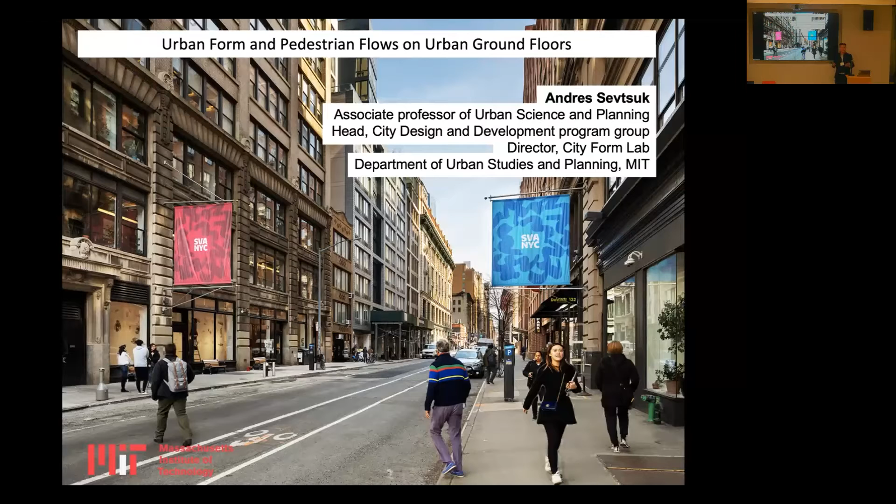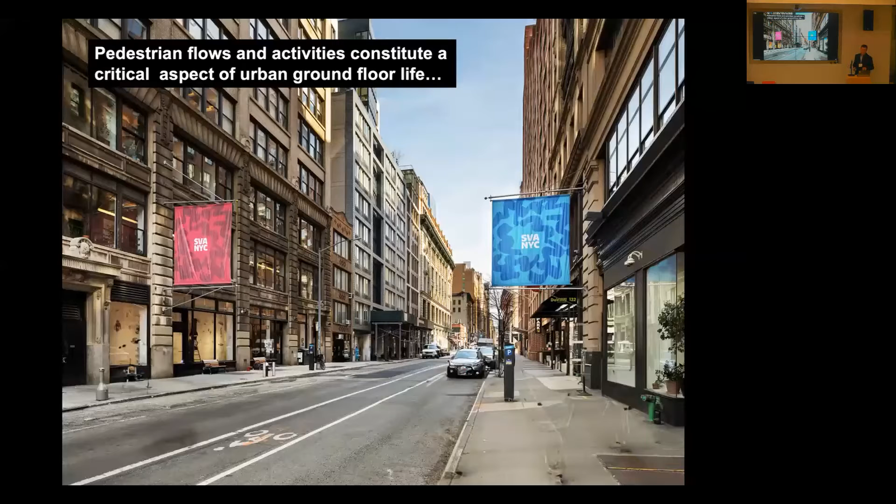Okay, so next I was planning to present some work we've done here at the City Form Lab Research Group on analyzing pedestrian movement in cities and how that interacts with urban design.

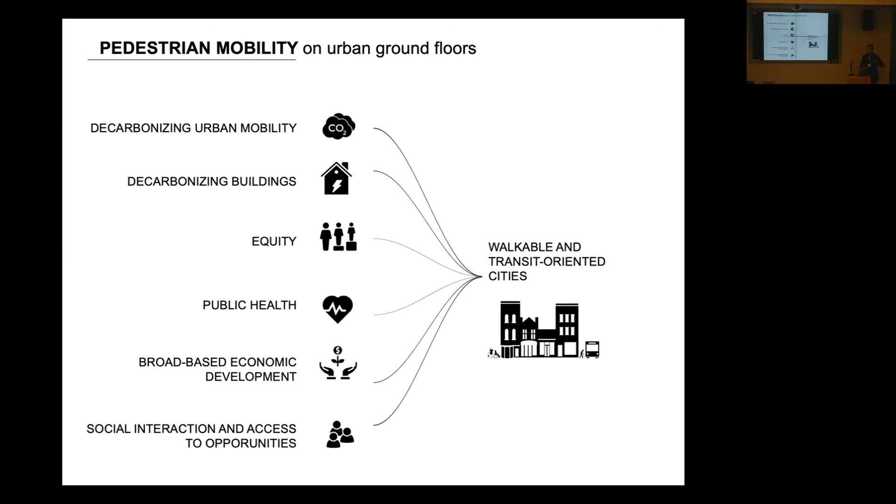And I think this question of pedestrian mobility and pedestrian behavior in public space has really relevance to urban design and planning across the board, from public health to decarbonization to social or even economic well-being. So there's broad interest around that.

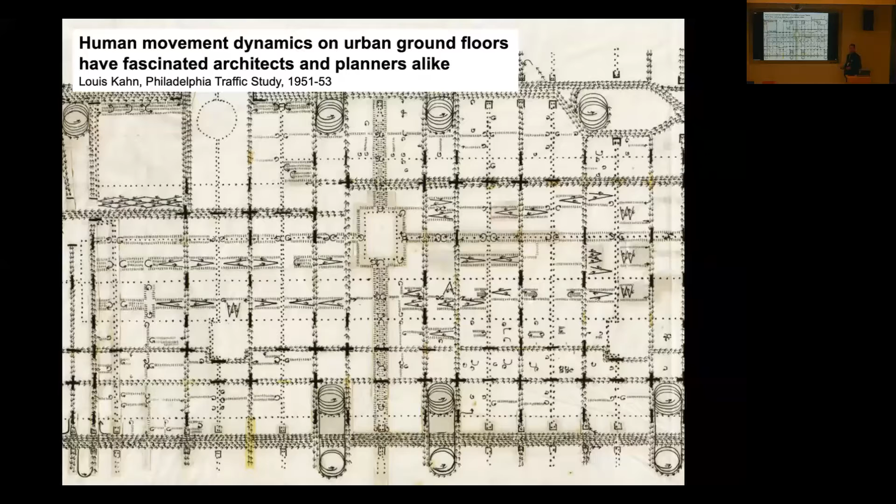And it's been a topic that, at least amongst designers, historically has been of great interest, like for instance illustrated here in a famous drawing by Louis Kahn in Philadelphia, the map that Brent showed yesterday as well. Folks who have written about this have argued typically that it's a really important quality of built environments that is something we can feel and act on, but cannot necessarily describe or record. This is from Alison and Peter Smithson.

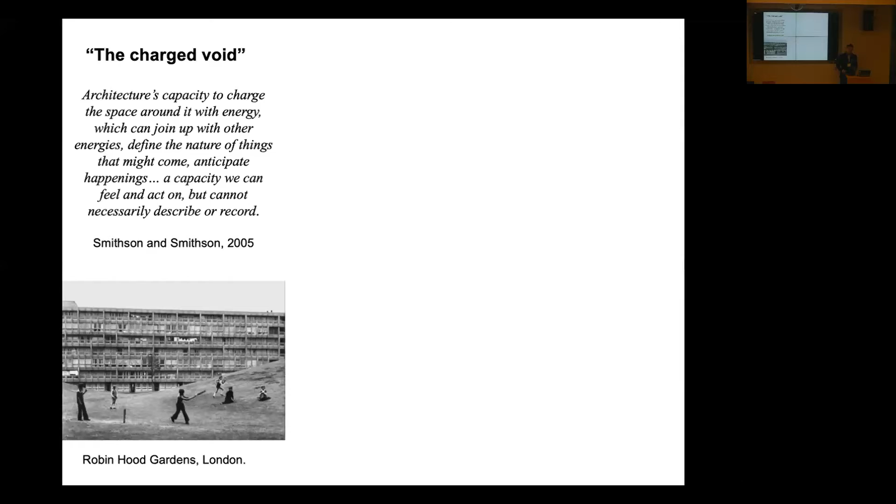Jane Jacobs famously referred to it as the sidewalk ballet, very poetically describing what happened on her Hudson Street environment in Lower Manhattan, or Jan Gehl, Life Between Buildings.

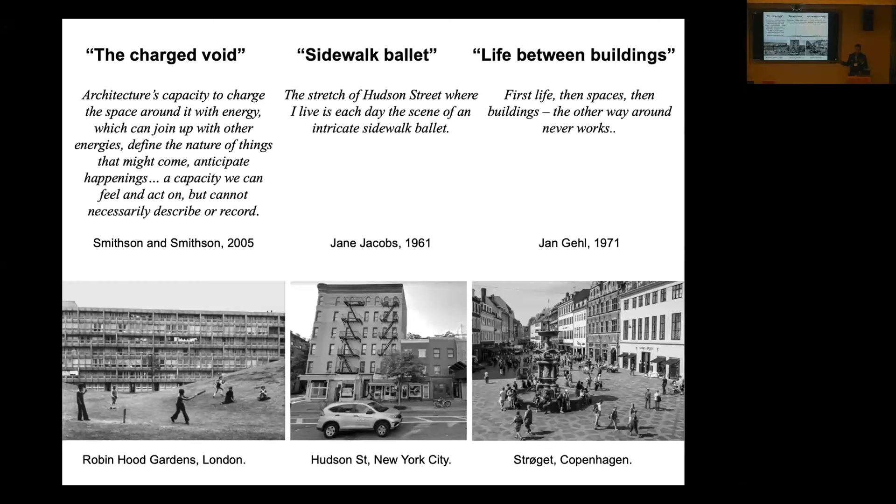So in the research group here, we have been working on ways in which we can actually measure and record how built environments produce pedestrian dynamics between the buildings. I'll briefly try to introduce the conceptual framework of how this is done, and then illustrate it with a case of some recent work we have been collaborating on with colleagues from the American University of Beirut.

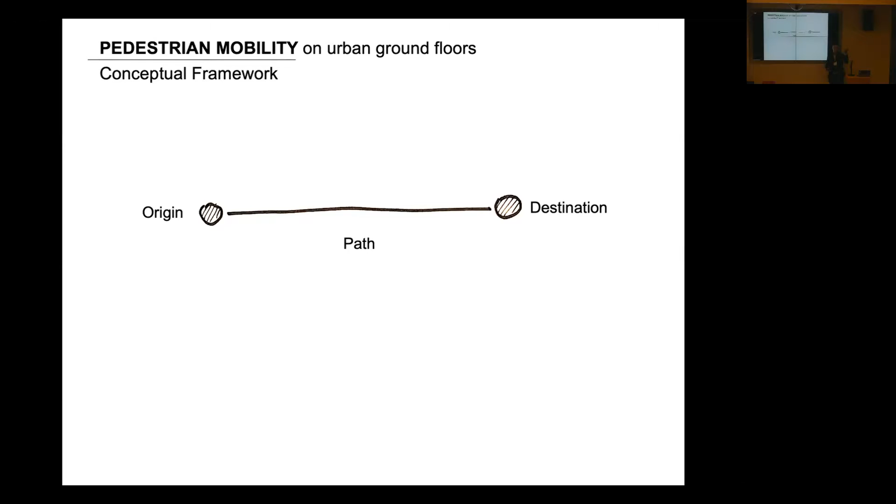So in built environments, in these sorts of trip models, we typically think of trip origins, trip destinations, and paths that connect them. These can be on the ground floor, or they can also be three-dimensional, going indoors and outdoors of buildings. The likelihood of anybody to make a walking trip from an origin to destination really depends on the perception of travel cost, usually represented by distance or travel time. As the distance or travel time increases, the likelihood of walking anywhere on foot decreases.

But it also depends on the characteristics of the route. So if the route is unpleasant, or is perceived as unsafe, or too hot or climatically inappropriate, then this likelihood really differs. It depends on how we perceive the cost of the walking path, and that's something that can actually be represented.

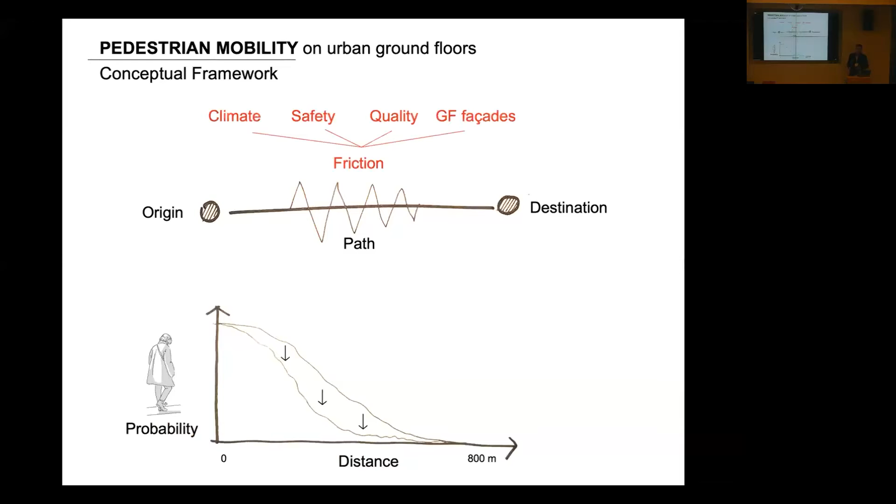So climate goes into it, safety, quality, the quality of the ground floor interface, as Stephen was describing yesterday, or the facade, and so forth. And of course, different people perceive these qualities differently. It's not universal for all.

If you're a healthy adult, you're probably willing to walk pretty long distances, as we've oftentimes seen from pedestrian surveys we've done in Boston and other cities. But if you're an elderly person, or a younger person, or a person with different abilities to move physically, that likelihood of walking over distance, and depending on the characteristics of the route, really changes.

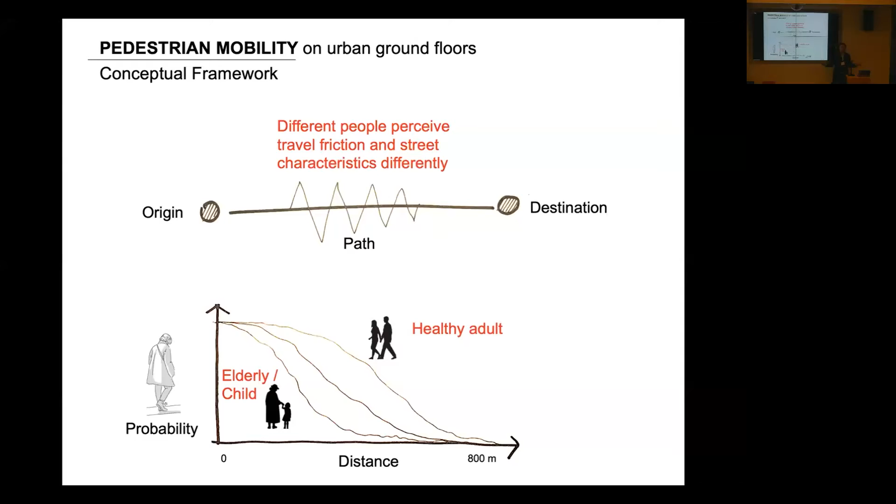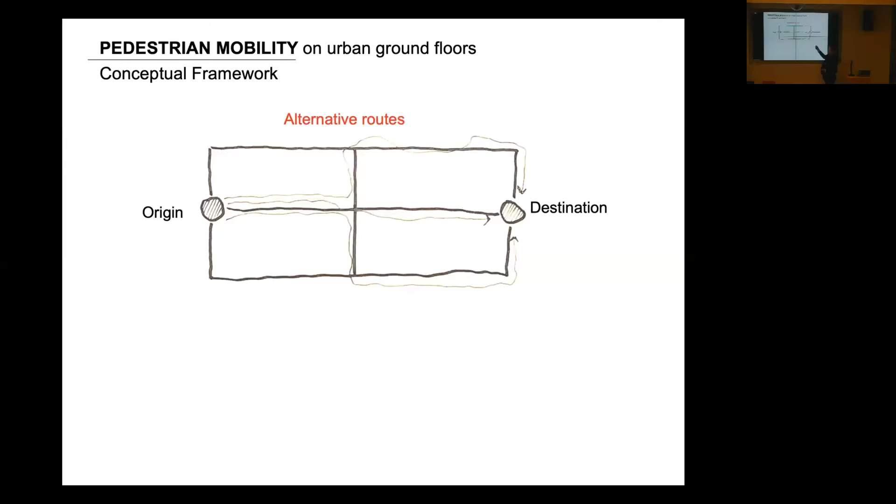Now, oftentimes people are also faced with alternative routes. They can walk not just one single way, but especially in dense urban settings with dense street networks, along many different routes. There's a process of route selection which again depends on the qualities of the routes, and those can vary by person characteristics. But people, even on different days, can take different routes, something that models have to incorporate.

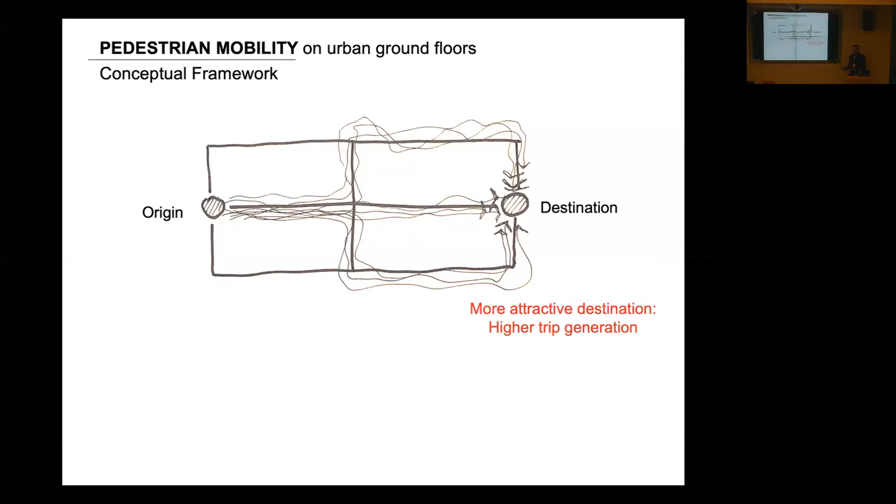Then the overall amount of foot traffic from origin to destination obviously also depends on the size of the origin, how many people are there. If we're talking about residential origins, bigger buildings obviously produce more trips than smaller buildings. And it depends on the characteristics of the destinations. The more attractive destinations pull more trips towards them, and less attractive destinations, fewer trips.

And if there are several destinations available, people make choices. If you talk about going to a park, for instance, you may have five different parks within a reasonable walk shed, so there has to be some logic of how we analyze which parks people go to. Oftentimes that is modeled or analyzed based on how accessible the park is and how attractive a park is, which can be measured to some extent.

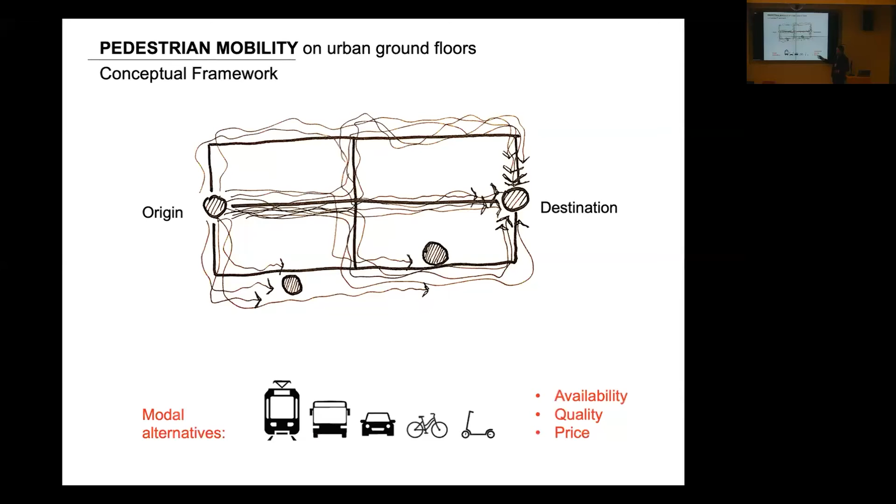And finally, it obviously also depends on the quality and availability of modal alternatives. So if it's really difficult to drive - say you're in central Paris and it's impossible to find parking, and traffic will keep you congested and stuck for an hour - oftentimes that's an incentive to not drive and to actually walk. But if you have a really fluid and amazing driving environment, even then, even if pedestrian conditions are impeccable, the alternatives might look even better and people will simply go for the better alternative.

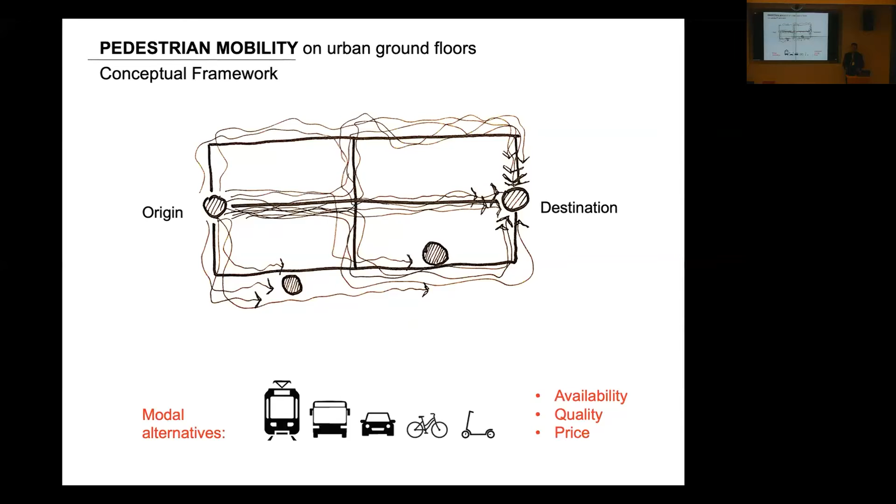So they work in combination or in comparison to each other. All of these things affect the number of people walking between origins and destinations in a city: travel costs, the choice of routes, the availability of alternative destinations, modal alternatives, and so forth.

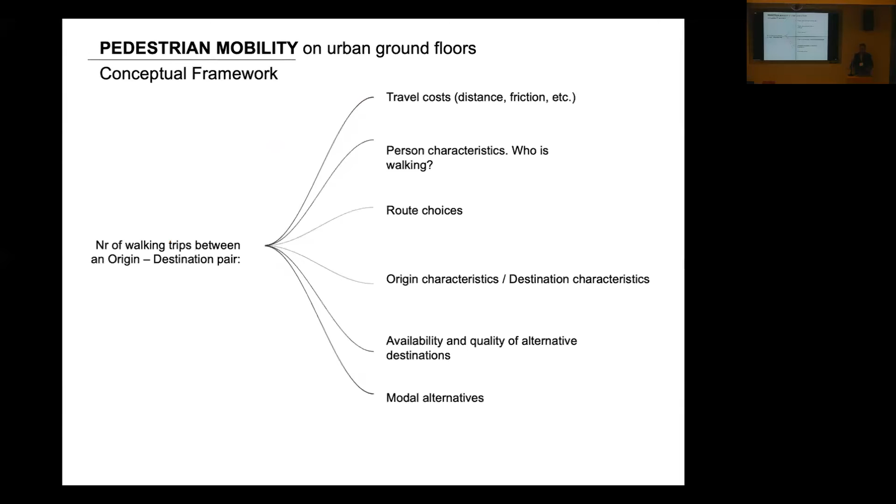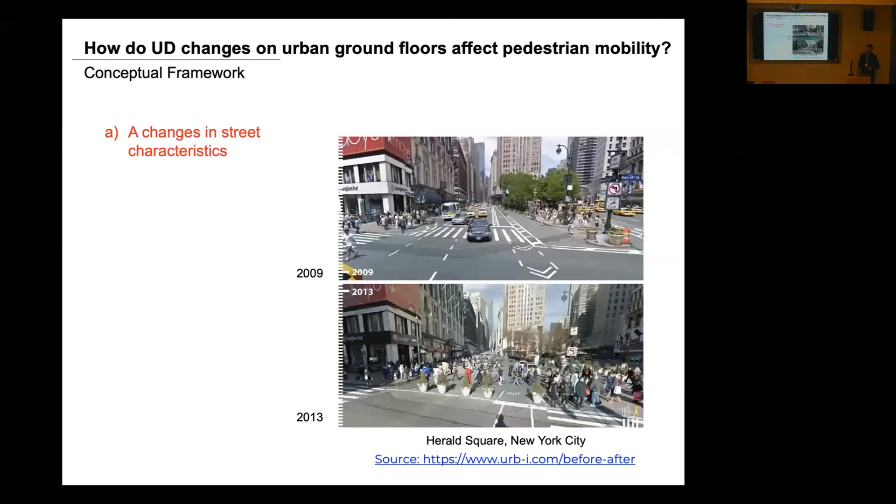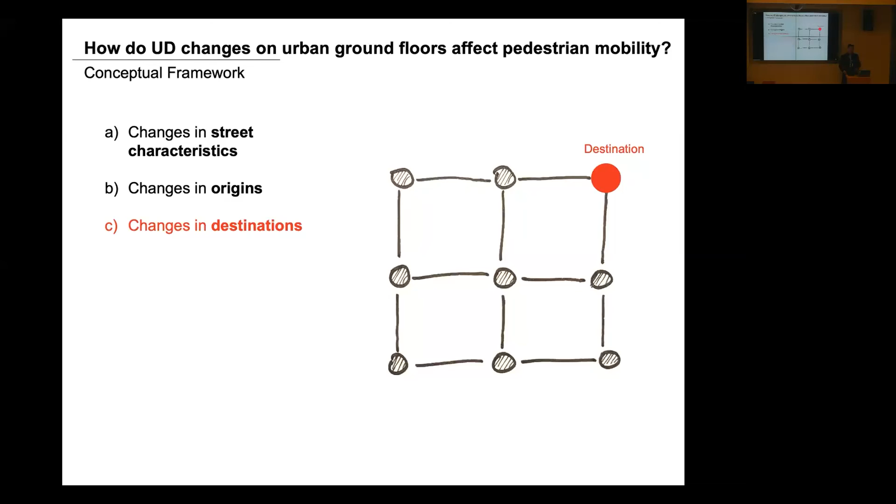What we can also do is change land use patterns in urban form and put more trip generators in places to increase foot traffic, usually through processes of densification and new construction. We can also affect the availability and quality of public destinations. For instance, having a ground floor interface, as Stephen was talking about, with more active fronts where there are destinations—cultural, service, or retail oriented—will create more draw to the streets and more destinations that people may want to walk to.

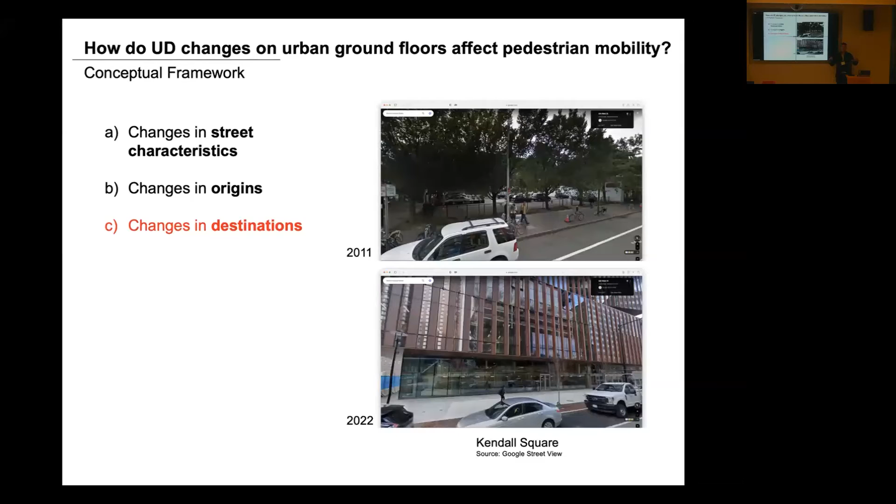We've seen this pretty starkly transforming the Kendall Square area in recent years. Right across the hotel many of you are staying at was a parking lot for many years, and it's only recently, through very strong efforts on behalf of the city of Cambridge, that those ground floors have been configured to be active and full of destinations.

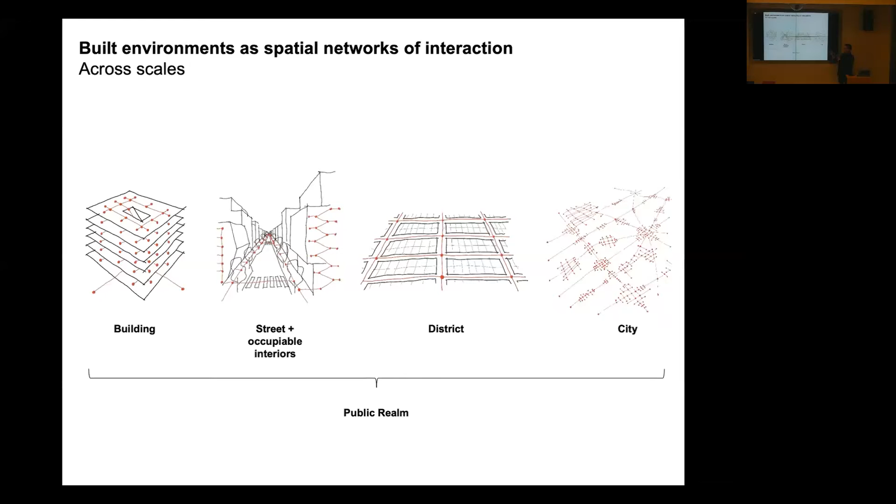To represent this conceptual framework and model it, we often work with spatial networks. We represent city environments as spatial networks, using a pretty scale-free approach from buildings all the way to metropolitan areas. There are software tools we've worked out to do that—a pretty widely used plugin for Rhino, which used to be a GIS plugin, and now most recently Aziz has been developing an open source Python library for modeling pedestrian trips called Madina.

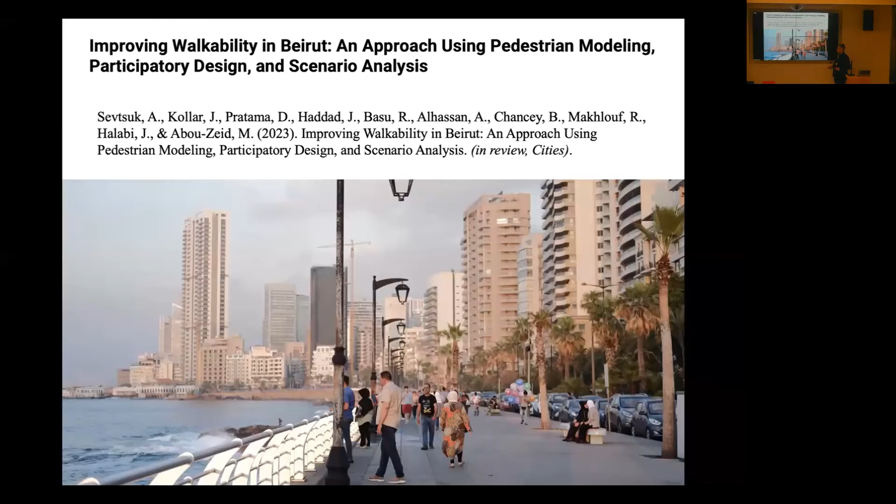So I'm going to use the remaining time to show a quick example of how, in the research group, we've recently collaborated with colleagues from Beirut, Lebanon, at the American University of Beirut, who have been working on walkability in Beirut, especially in the post-2020 blast period, to improve pedestrian conditions. We applied some of this work together with them in this project.

Quick context: Beirut witnessed one of the worst non-nuclear explosions in history, with a huge pile of ammonium blowing up in the port of Beirut. But that was not the only disaster—there was also an ongoing economic crisis, compounded by COVID-19. Many different things made driving even more unaffordable to many and heightened the question of neighborhood quality and neighborhood streets as people need to get around.

The study focused largely around the port of Beirut where the explosion occurred—the explosion is the number 6 dot. MIT was invited, through some Lebanese partners, to work on community improvement projects after the blast.

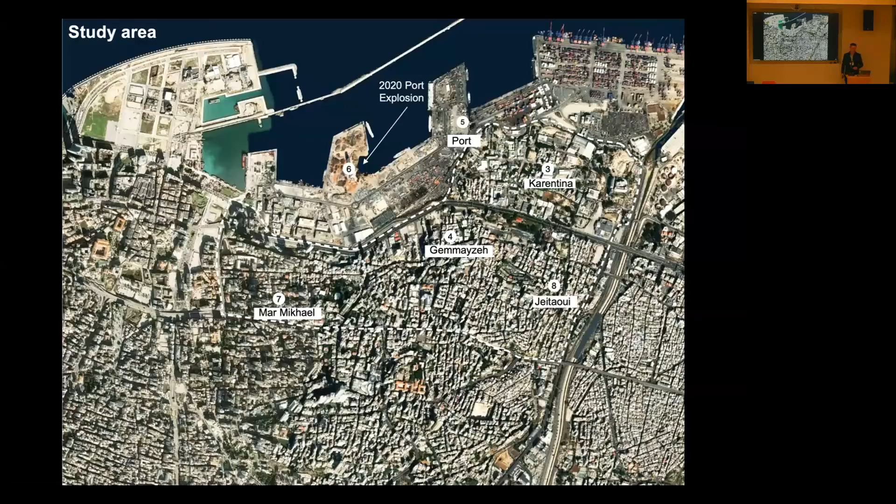So we teamed up with a team from the American University to look at walkability improvements in these blast-affected areas. The workflow included a serious effort of data collection, since official data is sometimes hard to get, building a pedestrian flow model for Beirut, and then participating in participatory design sessions at the American University of Beirut, representing improvement proposals from community members and stakeholders, and using that model to illustrate how each urban design change is likely to shift foot traffic on city streets in the study area.

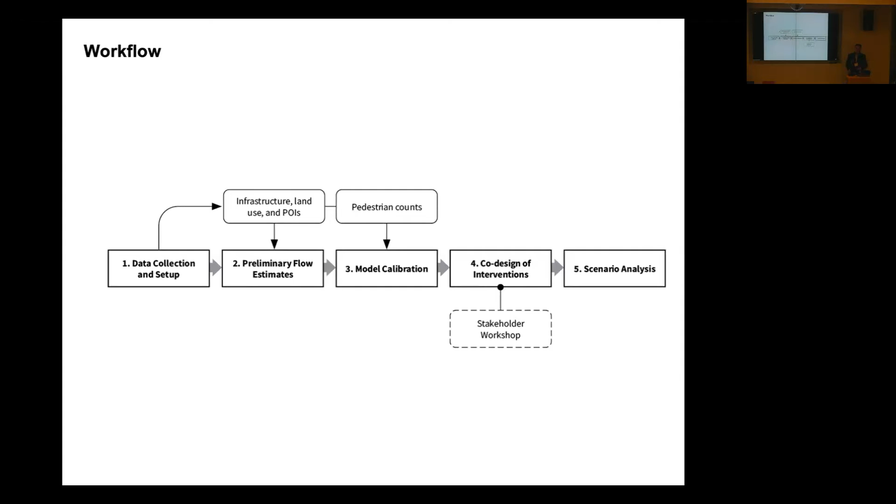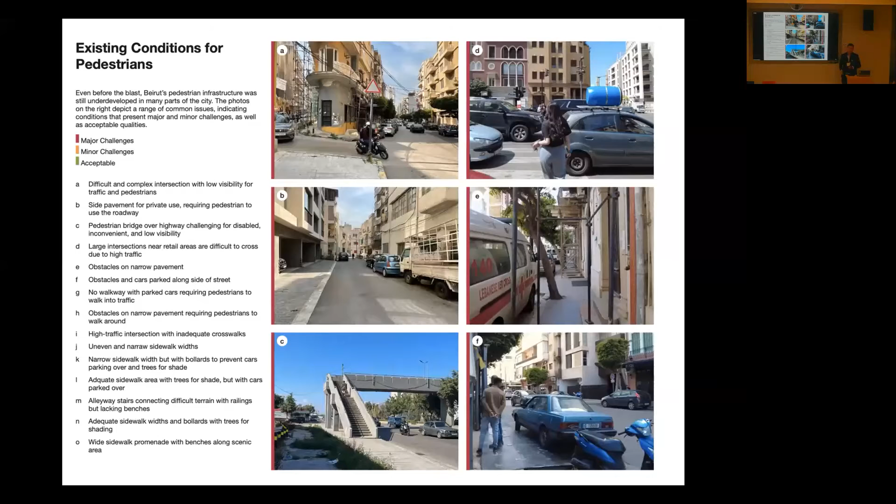There was a survey of existing street conditions, largely done by students and faculty at the American University of Beirut, covering many areas around the port affected by the blast, cataloged into different kinds of characteristics. Sidewalks were also mapped and sidewalk conditions documented, resulting in different data sets on that.

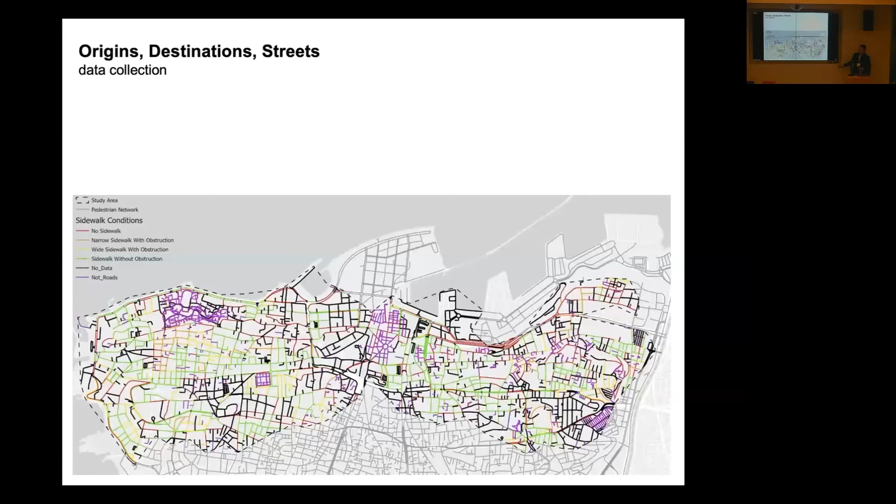One of the key methodological ways these models can relate sidewalk conditions to models of foot traffic is through pedestrian route choice studies. When these studies look at which way people choose to walk when presented with alternatives, they can statistically explain what route features are more likely to compel people to use them.

Typically we find that routes with more amenities on the sides, wider sidewalks, more greenery and street furniture are preferred by people, while routes with more traffic noise, higher traffic volumes, and more congestion—pedestrian-wise—are discomforting and not preferred.

From these route choice studies, it's possible to take their findings and statistical coefficients and use them in predictive models, so that when we route or estimate trips, we do it according to the route choice coefficients, translating the impact of something like an additional amenity. We've estimated, in different cities, that passing one extra amenity is often perceived as equivalent to the walk feeling almost 2 meters shorter. So if you pass 10 amenities, the walk feels 20 meters shorter.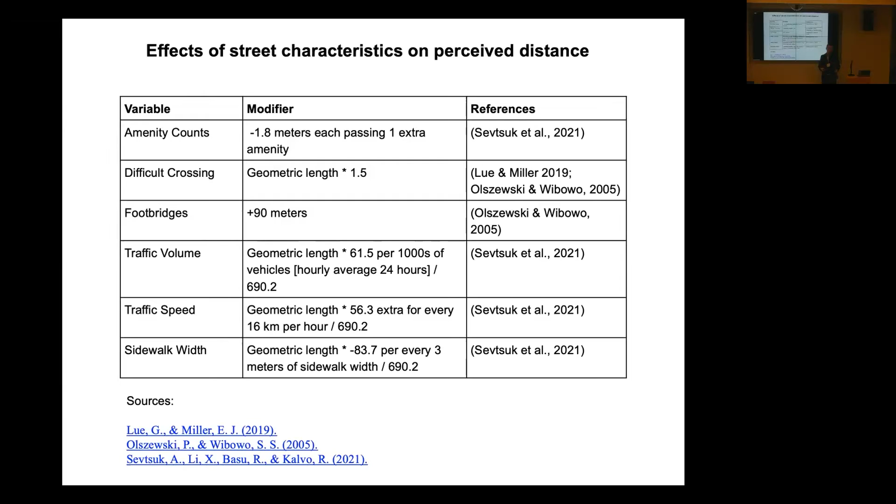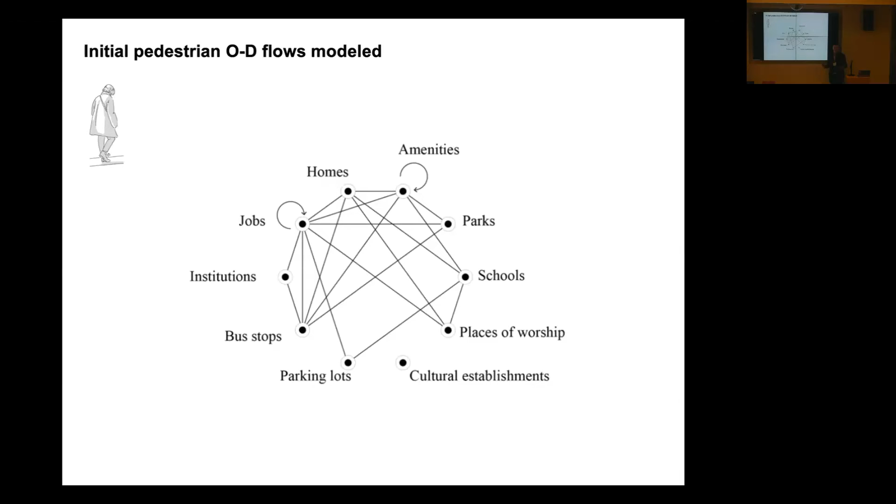We estimate trips between various origins and destinations at the address level resolution, building to building, within Beirut, and route them through the pedestrian network. We don't assume people take the shortest path, but allow them to take many alternative paths that are up to a certain percent longer than the shortest path, producing a representation of estimated foot traffic.

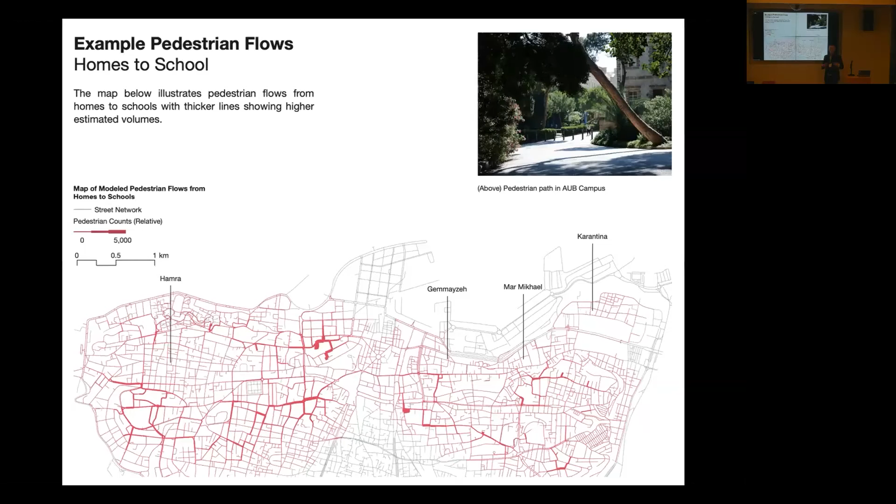This map shows estimated foot traffic from homes to schools during the morning peak hour. The origin points are thousands of buildings that are homes, and destinations are schools, with a destination choice model. We don't assume people only go to the nearest school, but route trips to all the schools available along all available routes, depending on route characteristics. Schools that are closer, or have higher capacity, tend to get a higher allocation than others.

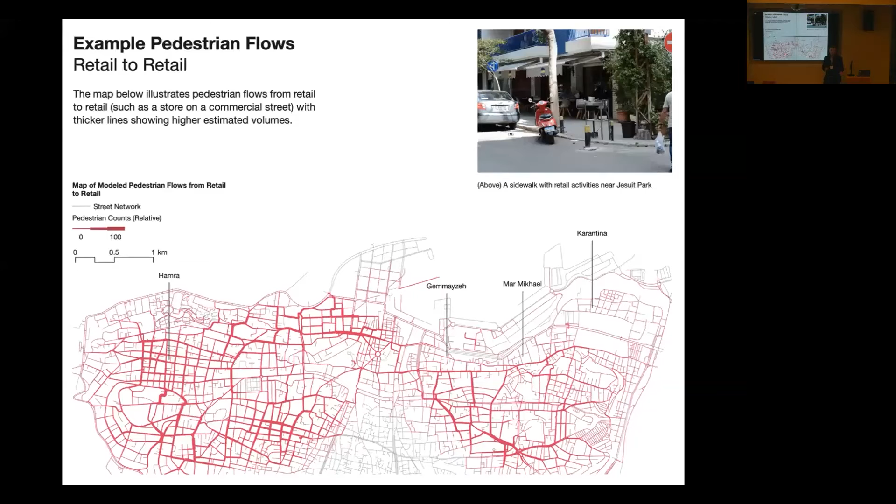This is another one, a retail-to-retail trip. This is from retailers, food service places, entertainment venues, and personal service places to other like places, showing the foot traffic estimate between them.

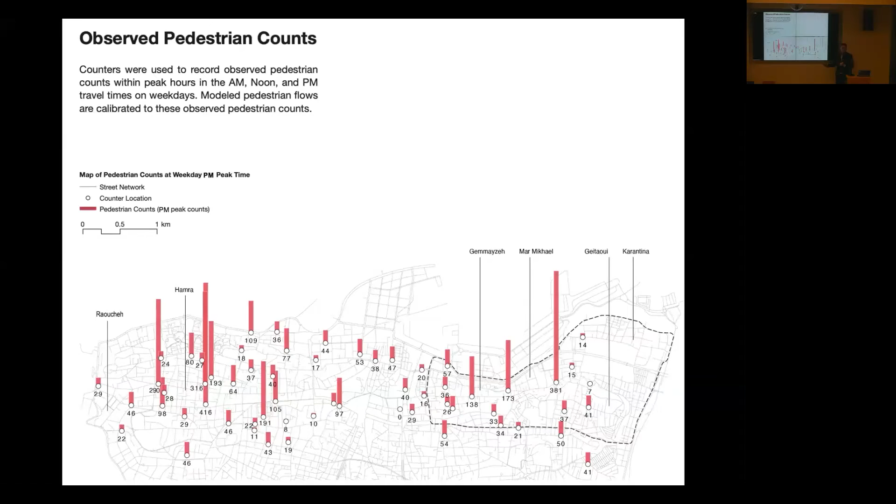Once there's a set of estimated pedestrian flows, these models are usually calibrated on actual pedestrian counts. As part of this project, our colleagues in Beirut organized pedestrian counts at 90 locations throughout the city center, counting on different days how many pedestrians were actually observed on city streets. This data is used to calibrate the estimated model so it matches the levels of foot traffic we observe during different times of day and days of the week. This is the model calibration.

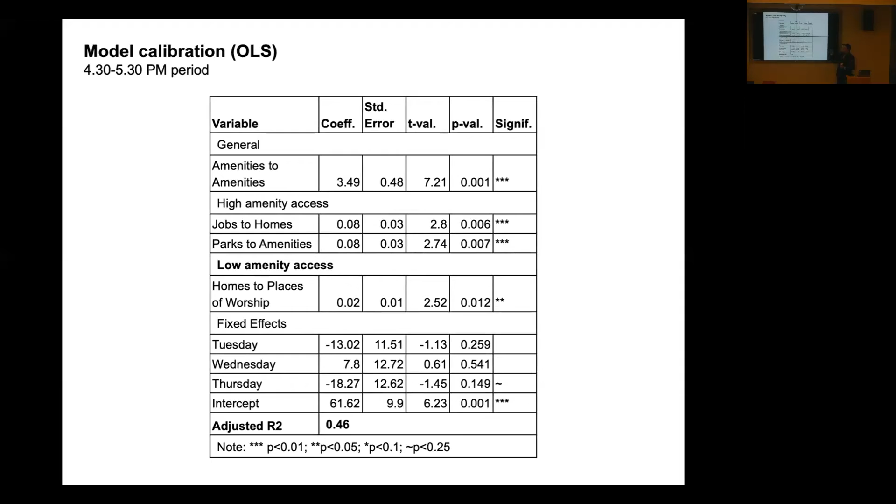For the evening peak period during weekdays, the kinds of pedestrian trips that explain most of the variation in pedestrian counts are retail-to-retail or amenity-to-amenity trips, trips between homes and jobs, parks and businesses, homes and places of worship. There were various day effects and other effects in these models. Once calibrated on the actual counts, this produces a representation of foot traffic across different trip types, a combination of trip types with different likelihoods calibrated on the observed count.

You may recognize this is similar to how cities have historically done traffic models for vehicles. We've had this for decades, called travel demand models. The ambition in these models is to give the pedestrian the same gravitas in conversations about streets getting investment and redesign. Often the only people with information about trip volumes are traffic engineers who say there's 1,000 cars on a street, so it needs investment for X number of lanes. We've tried to provide similar information about pedestrian dynamics and flows on city streets.

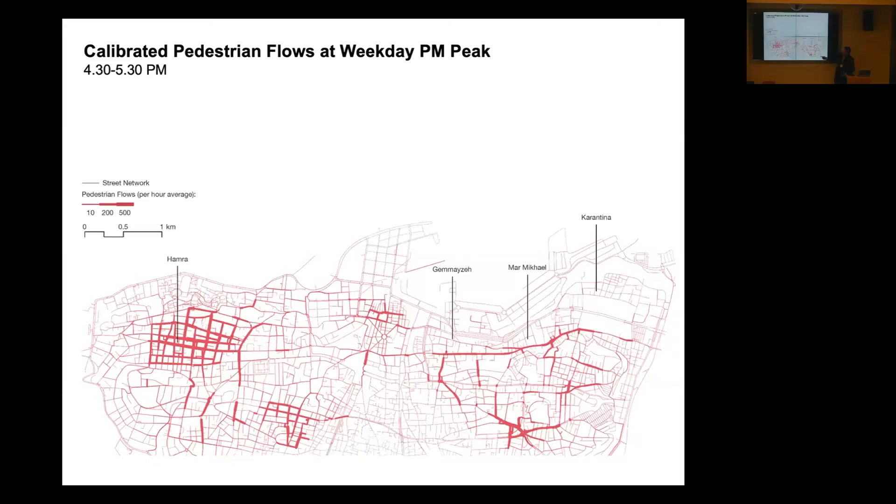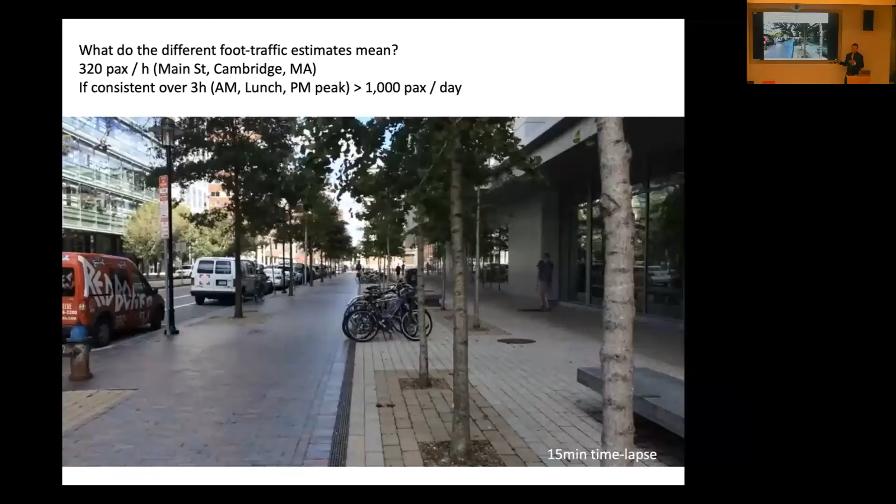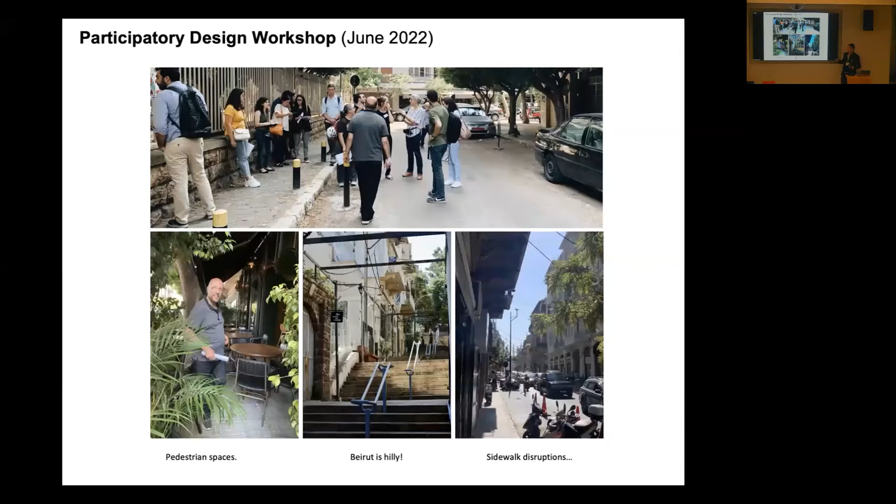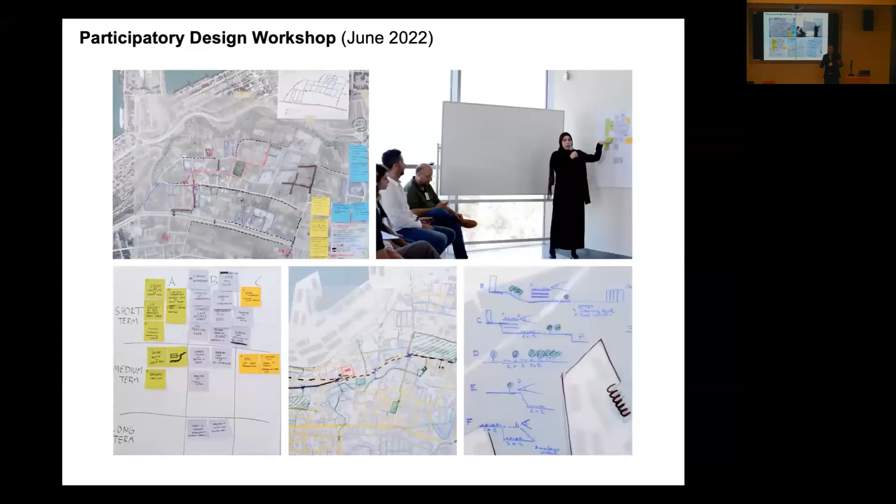The American University of Beirut organized a stakeholder workshop on their campus to bring together community stakeholders and interested parties to propose improvements in the blast-affected neighborhoods of Beirut. This workshop resulted in many teams working on proposals to improve walkability in those areas. Afterward, the research team collected these ideas and synthesized them into specific urban design scenarios.

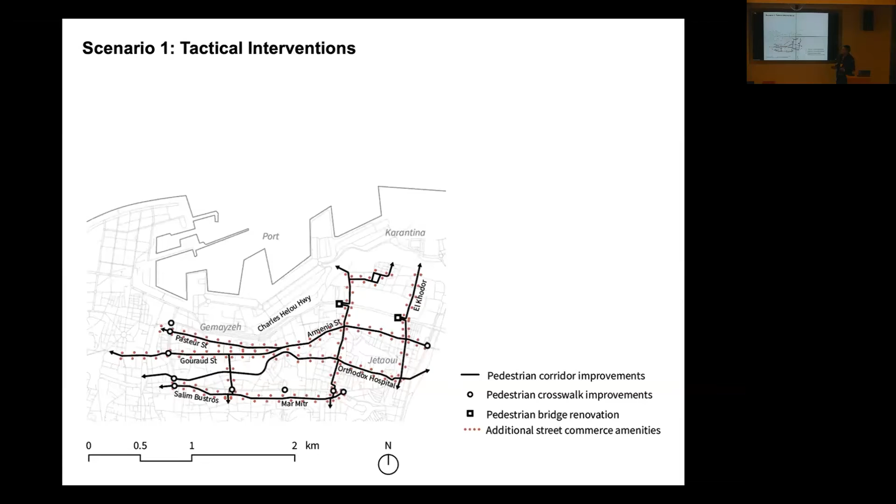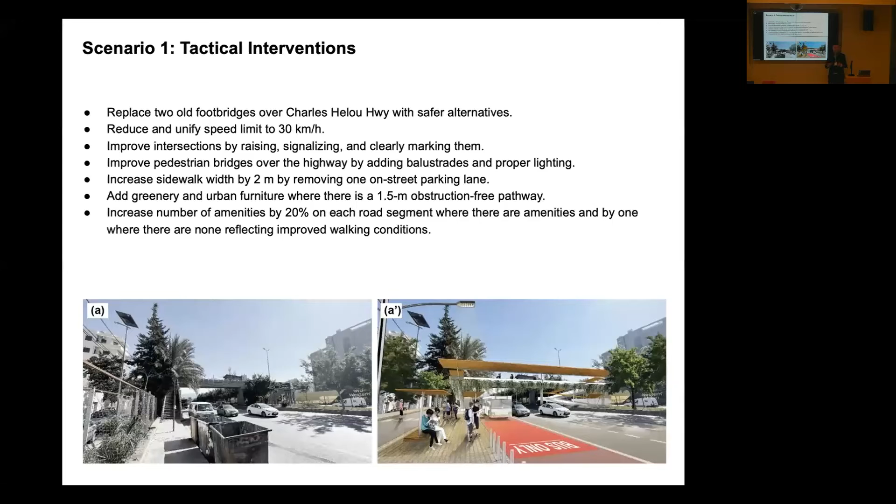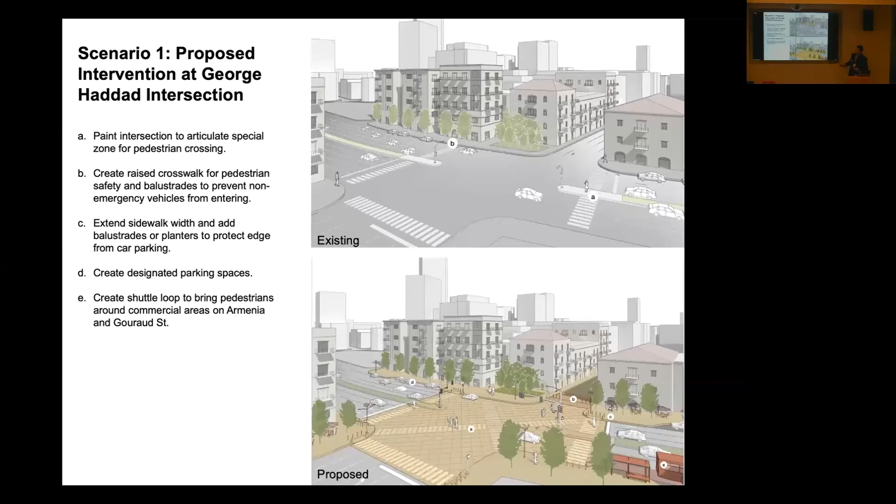Scenario one was fairly tactical interventions of low-cost street improvements and traffic reductions. These interventions were then visualized and represented in the pedestrian flow model as changes in either origins, destinations, or route characteristics. For instance, if there was a reduction in parking capacity on a street, the sidewalk grew larger and traffic volume decreased, which we could translate into an effect on friction. How much does the sidewalk improve in quality and attract more trips? Through this, along with examples like intersection improvements proposed at the workshop, it was possible to estimate the impact of that scenario before and after.

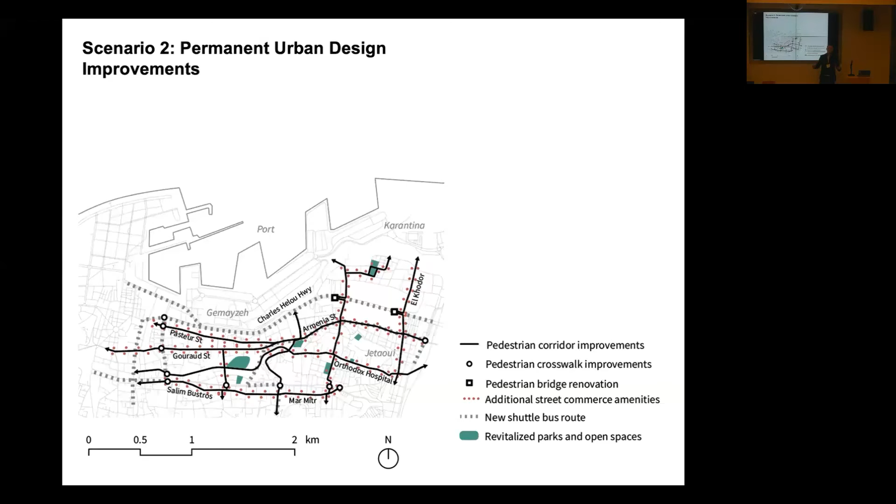Scenario two contained fairly substantial urban design improvements that were no longer just tactical, but introduced full-scale public space improvements on certain streets, and interestingly, the opening up of all green parks. Beirut is not very green, and even beyond that, the parks it has have been locked since COVID, largely because they attract a lot of Syrian refugees, and the city has just kept them locked. So we estimated: if you open them up to the public as public spaces, how much would that change people's walking patterns throughout the city?

We went through a similar estimation process, looking at what these particular changes would produce in the model, and an illustration of how these park openings and more substantial urban design changes affect foot traffic.

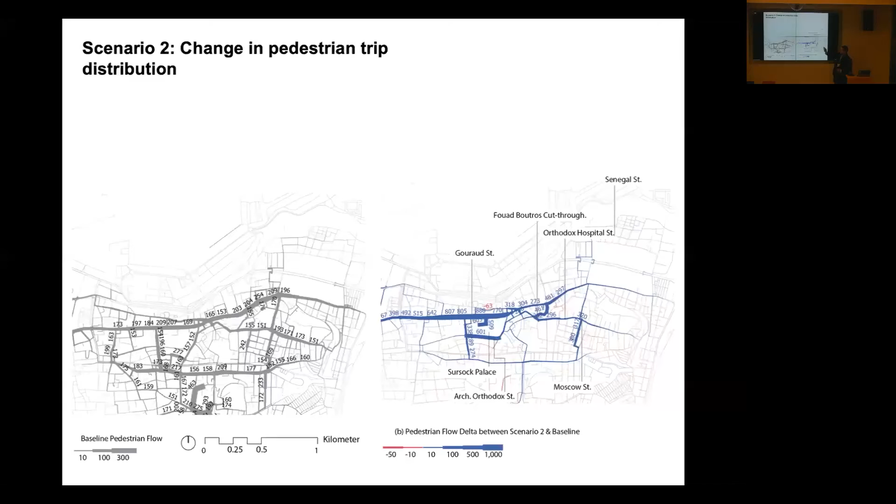As an example, on some streets what used to be 200 people per hour, with these substantial urban design improvements and amenity changes on the ground floor, could go up to 800 people per hour. So it's a very significant increase in foot traffic potentially.

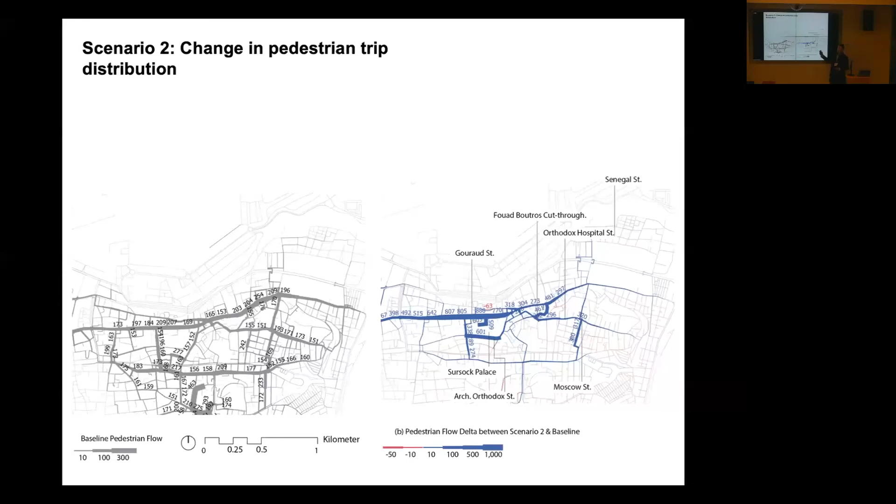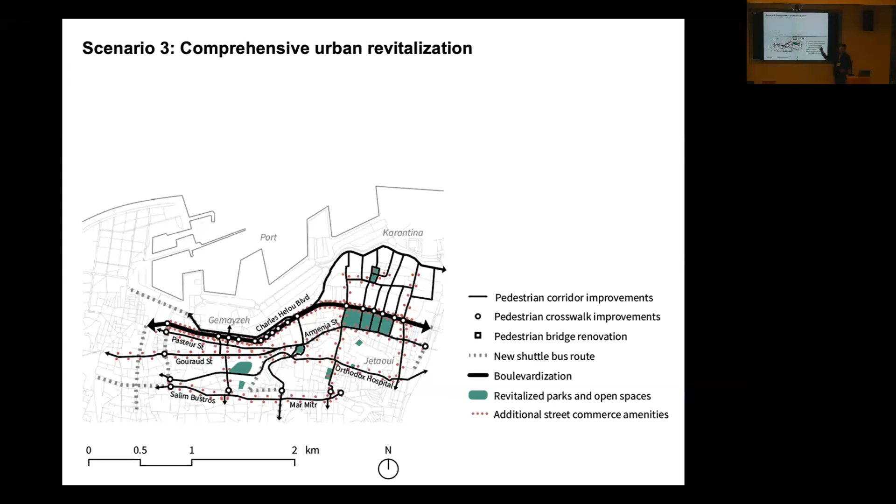There was also a very forward-looking, future-oriented scenario that many people looked at: the conversion of the Charles Helou highway into a boulevard, and opening up the area called Karantina, which almost blends into the port of Beirut today, as a continuous grid where you can easily walk across this current-day highway and have a Corniche Boulevard extension that goes past the port and opens up access to the seafront. This was a much larger scale intervention.

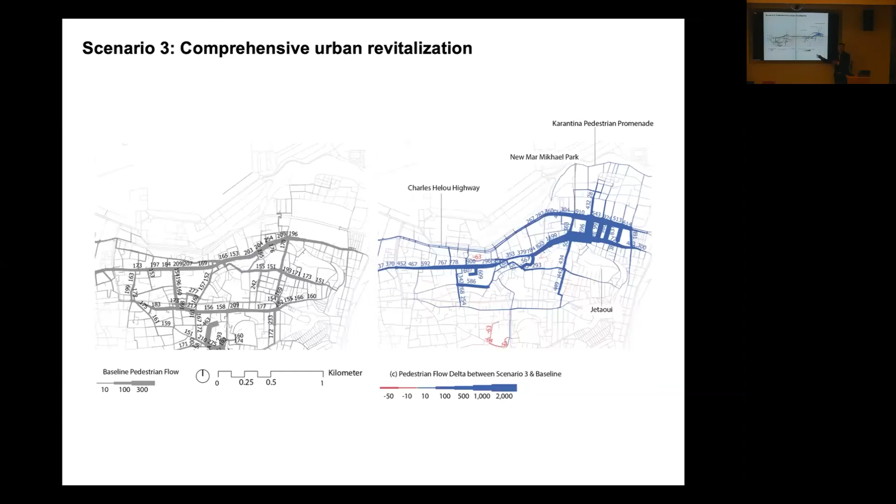Again, the pedestrian flow model was used to illustrate and estimate how much that would change foot traffic geographically on different streets. In these previous tables, we also show the overall level of foot traffic change from current conditions, over 100% improvement or increase from current conditions.

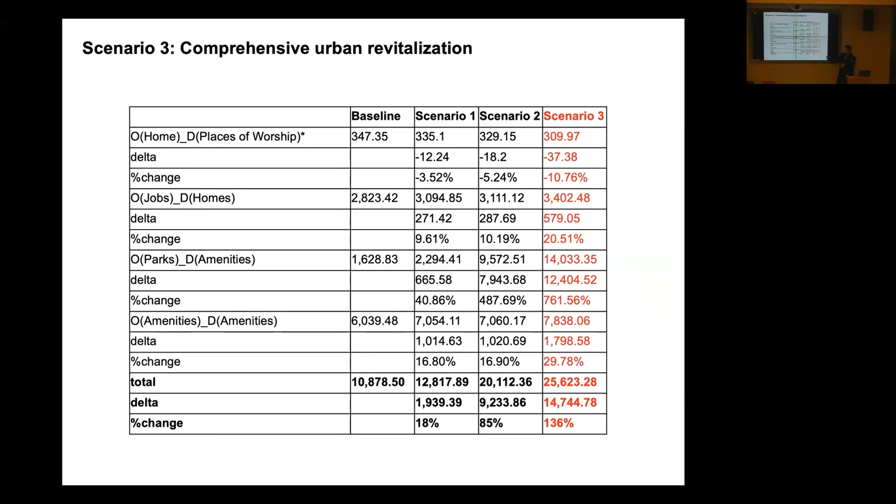So to conclude, pedestrian activity has all sorts of connotations in urban design and planning, from public health to social and economic questions, but oftentimes decarbonization seems to be one of these hooks that city governments currently care about the most — how to create a modal shift to actually get people out of vehicles and into public transport and as pedestrians.

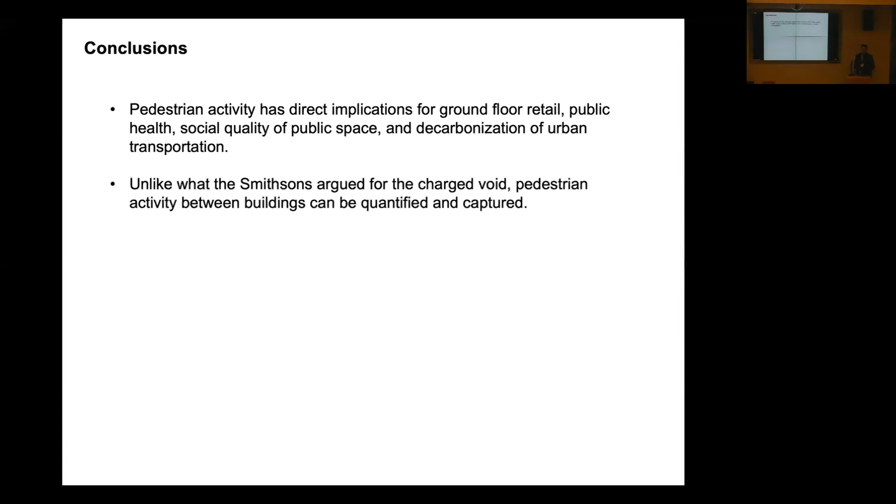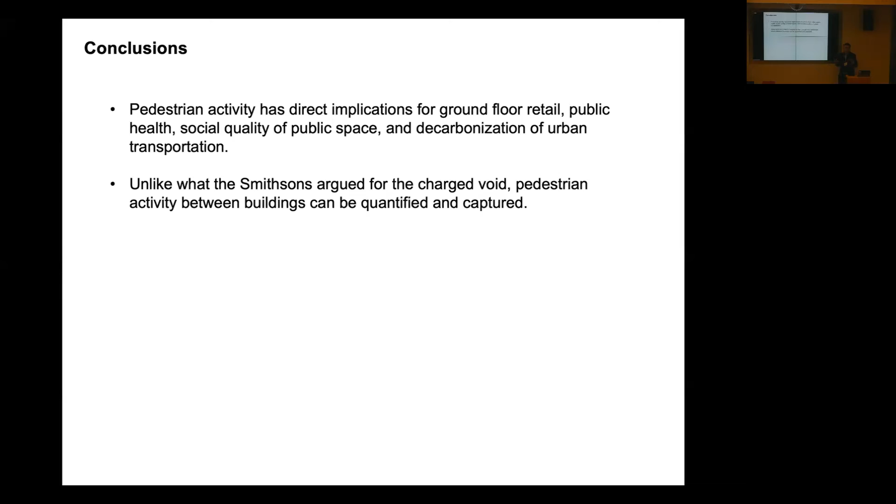Therefore, it's important to document and analyze how changes we implement today will impact outcomes tomorrow. I would argue that unlike what the Smithsons said, that the charged void, the sidewalk ballet, or the life between buildings is something we can only experience but cannot actually analyze — that's not quite true. We can actually try to analyze how urban design and architecture decisions, changing land uses and street qualities, will result in changes in pedestrian behavior and foot traffic. It's important to do this so that we can move the needle towards more walking and more public transit use, and actually result in mode share.

This is something that traditionally traffic models do not do. None of the traffic models I'm aware of really take a close and detailed look at foot traffic — it's almost always exclusively vehicular traffic, sometimes vehicular traffic in combination with public transportation.

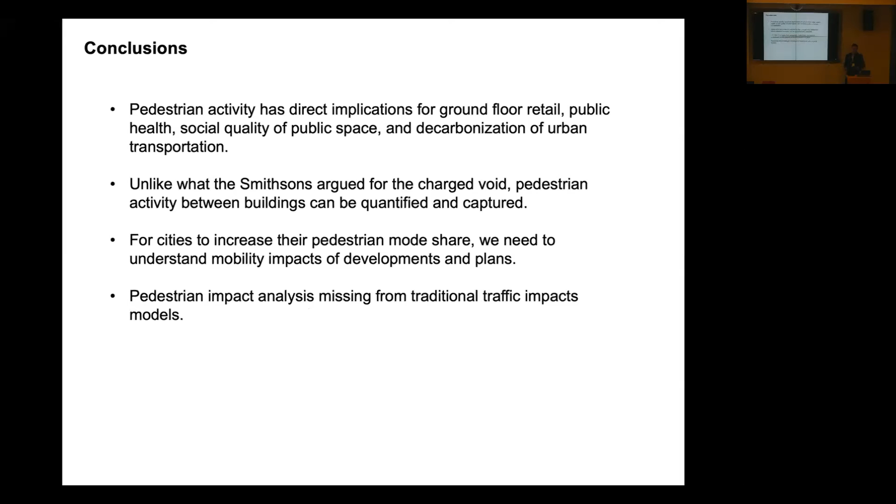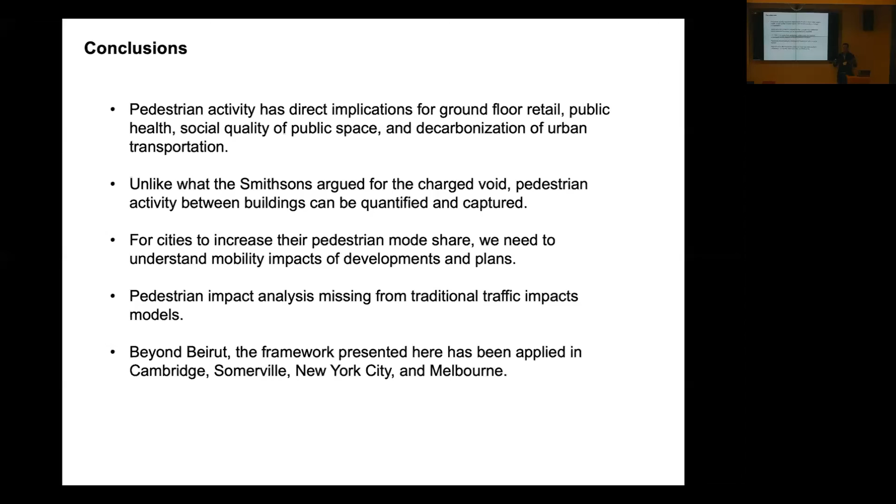We've tried to do this in some other cities too, including Cambridge and Somerville, and are currently working on New York with Eric and some other partners from DOT to develop a citywide pedestrian flow model for New York City.

There's a new open source Python library coming out this fall. If any of you are interested in incorporating some of these models into your own work, this makes it a whole lot easier than some of the previous tools we had.

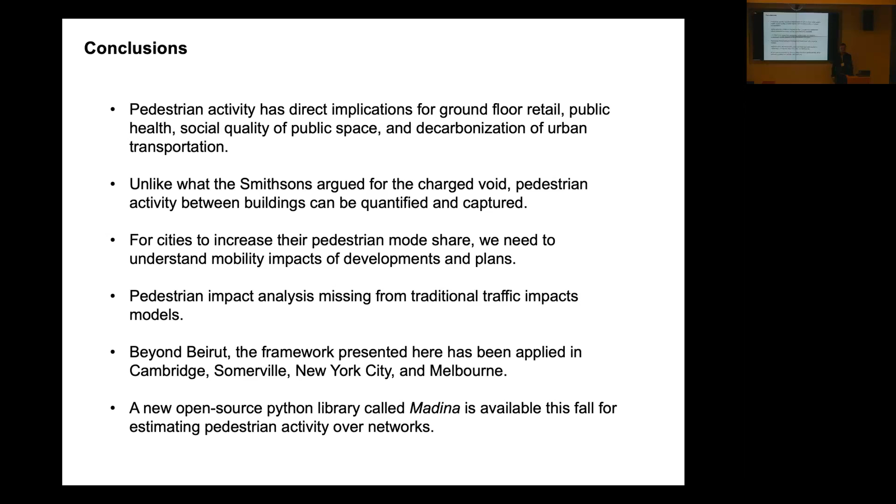So I think we're over time. I have to cut myself off. Sorry.